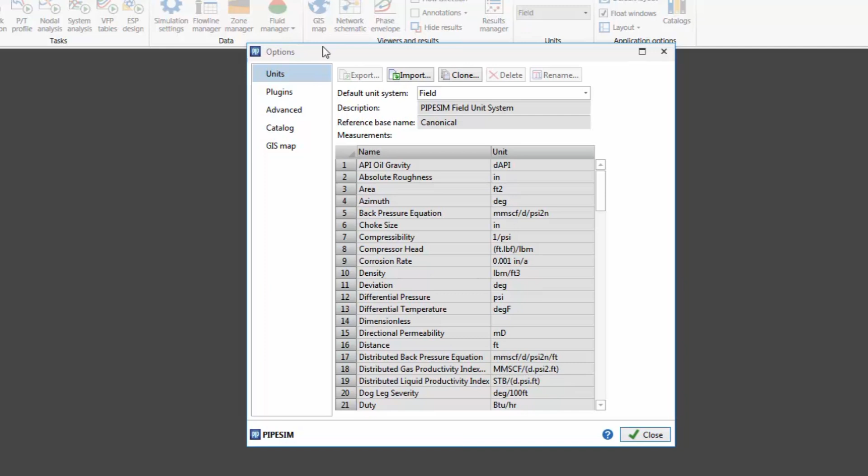Next, we have an Options tab, which allows us to configure the default unit system as well as customize unit systems. There is a Plugin tab to register plugins for user-defined flow correlations or user equipment.

There's an Advanced Application Options tab, a Catalog tab that allows us to upgrade catalogs from previous versions that may contain user-defined pump or compressor curves, and finally, various options for the GIS map.

Returning to the New Model tab, I'm now going to open an existing network. Here I'm going to select from the Case Studies directory, Case Study 301 Small Network. I'll double-click to open that, and here you can see the network appear.

Now, this particular network has one source, one well, a separator that sends the gas to a compressor and then through a pipeline to the sales point, and another line that carries the liquid to a pump and a pipeline to the oil facility.

PipeSim has a ribbon-style interface. The primary ribbon tab that you'll be using is the Home tab. Here there are various simulation tasks that you can run, depending on which objects are selected.

If no objects are selected, you can run a network simulation. However, in order to run other single-branch simulations, you need to select an object that contains a fluid source in order to activate these options.

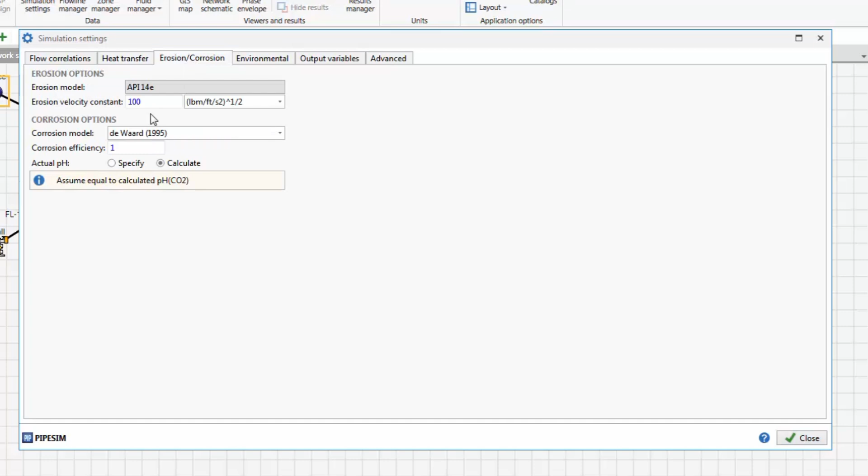The Environmental Data tab allows us to set global values for various environmental properties, such as the air temperature, wind speed, and the type of soil. And if it's an offshore system, we can select MetOcean data, which will provide the temperature and current as a function of depth.

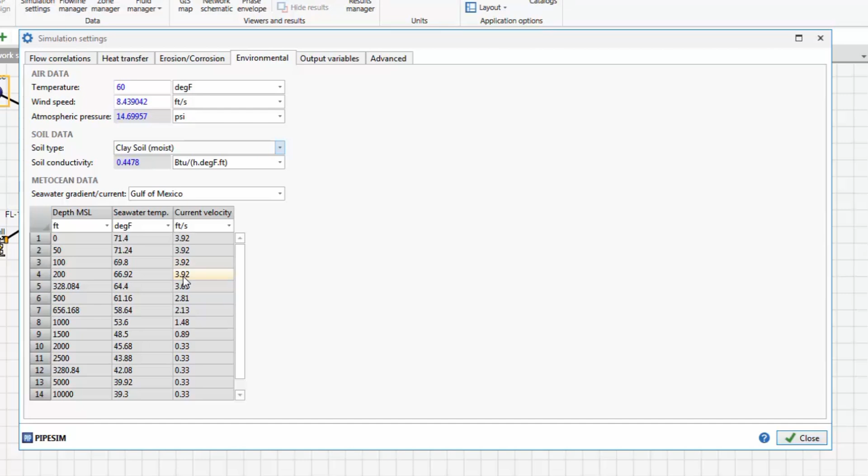Next is the Output Variable tab. Here we can configure the various output variables that we see after we run a simulation for both profile and system variables. There are several templates that ship with PipeSim that you may select. And finally, there's the Advanced tab, which is used for more advanced settings for your simulation model.

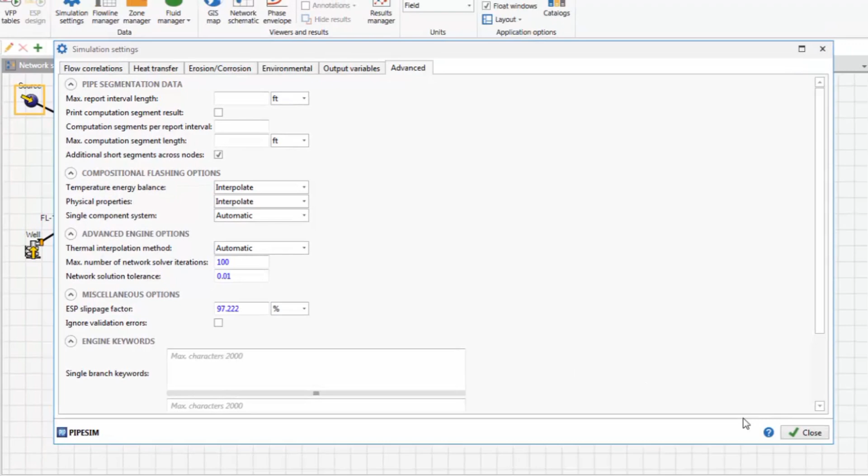Now, after closing this, we can look at the Flowline Manager. The Flowline Manager is a list of all flow lines in the model. You can easily change some of the values shown here in this table, or you could double-click on a row to open the specific flowline editor, so you can make changes here.

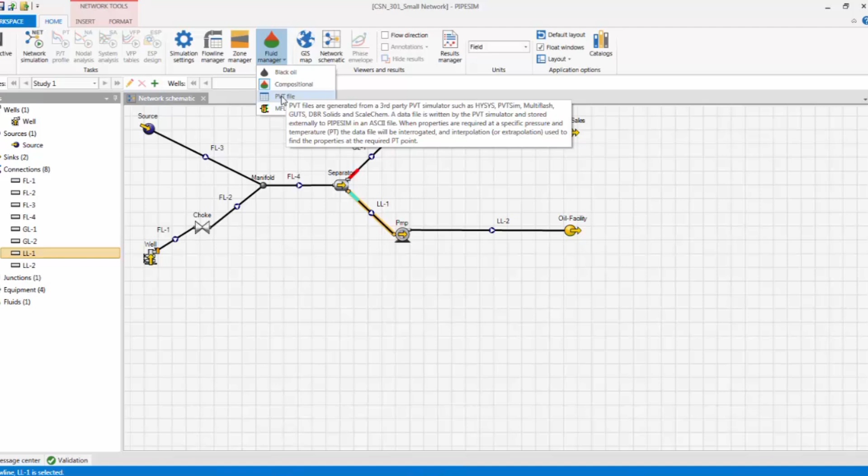Next, I'll talk about the Fluid Manager. There are 4 different types of fluid models in PipeSim: black oil, compositional, PVT files or lookup tables, and multi-flash files. In this case, we're going to run with a compositional fluid model.

Here, we can set the flash package and also select various other options, including the components in our system. From the Fluids tab, we can define multiple fluids and edit these individual fluids.

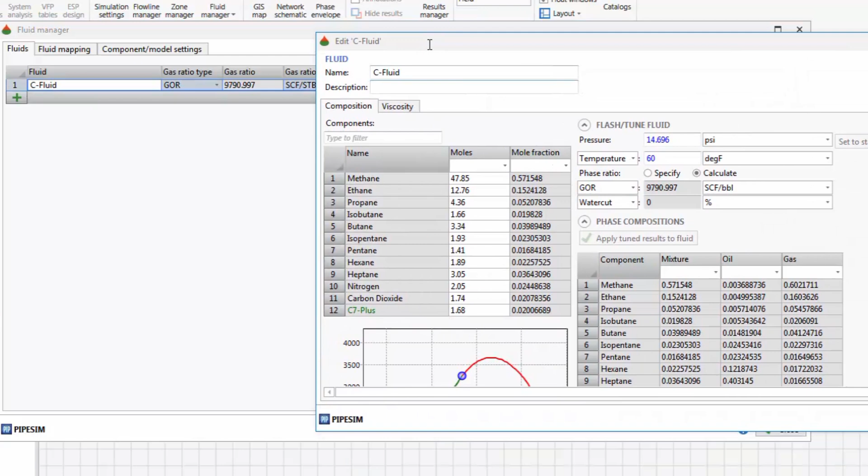And with the Fluid Mapping tab, we can associate the fluids that we've defined with the sources that introduce the fluids into our model.

Next, in this group, we see our viewers. Here we can select to work within the network schematic or logical diagram, or choose to work within the GIS map. Also, we have a phase envelope viewer, which allows us to see, for compositional models, the phase envelope with the production path superimposed on it for branches that contain fluid sources.

Finally, after we've run our simulation and we wish to view results, there are various options for looking at the flow direction, as well as other annotations that we can display. And also there is a results manager that will show us a list of the various simulation runs that we've made and allow us to view and analyze the results.

This group here is the unit selection group. This allows me to quickly change any of the unit systems that are predefined in PipeSim or that are customized from the Workspace Options menu.

This group here is the application options, where I can view and edit catalogs of equipment and change the layout for PipeSim. There are various layout options that position the inputs and task panes in various locations as defined based on your preference.

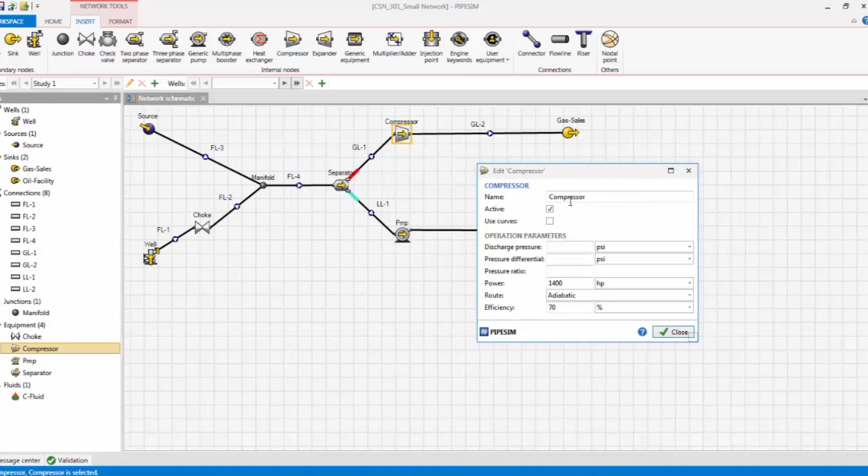Once we've inserted all the objects comprising our model, we can edit these objects simply by double-clicking on them. Here we can modify the properties of these individual objects. And to select another object, you don't need to close this editor. You could simply select other objects from either the network diagram itself or from the inputs tree.

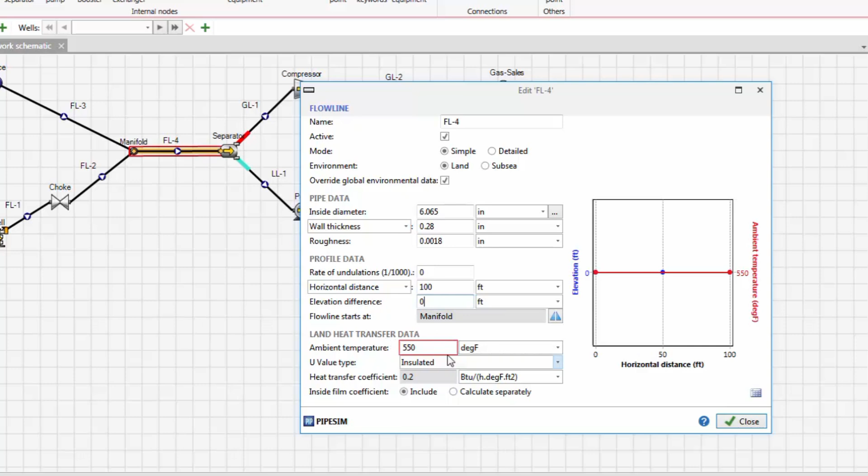So another thing to mention is if I select an object and I enter data that is invalid, you'll see a red box surrounding that field. If you mouse over the field, you'll see what the expected range for that particular value should be.

Additionally, you'll see that there's a red sign on the validation pane, which shows which object has an invalid value. You can open the object by clicking on this link and make the correction.

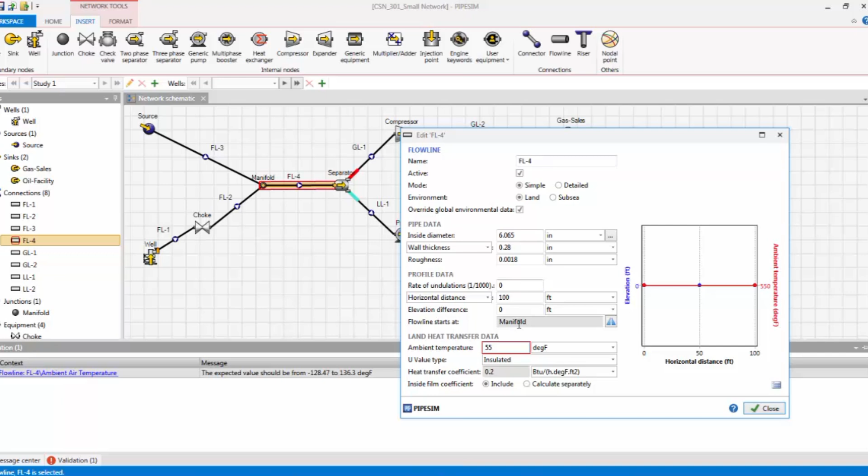Next, we'll go back to the Home tab and select the Network Simulation task. Here, we configure the Network Simulation task with known boundary conditions, and when our number of supplied PQ specifications equals the number required, we can run the model.

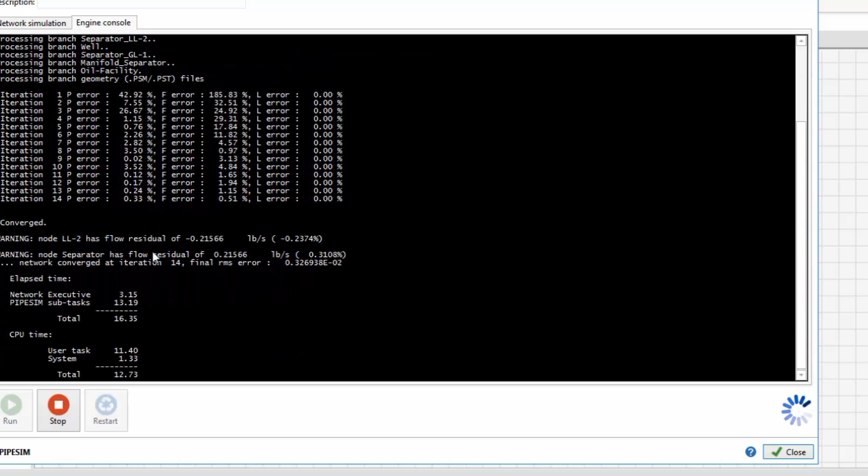Once the model solves, we could then inspect the node and branch results in tabular format, as well as the profile results in either tabular format or graphical format. For more details on running a network simulation, please refer to the demo video on that topic.

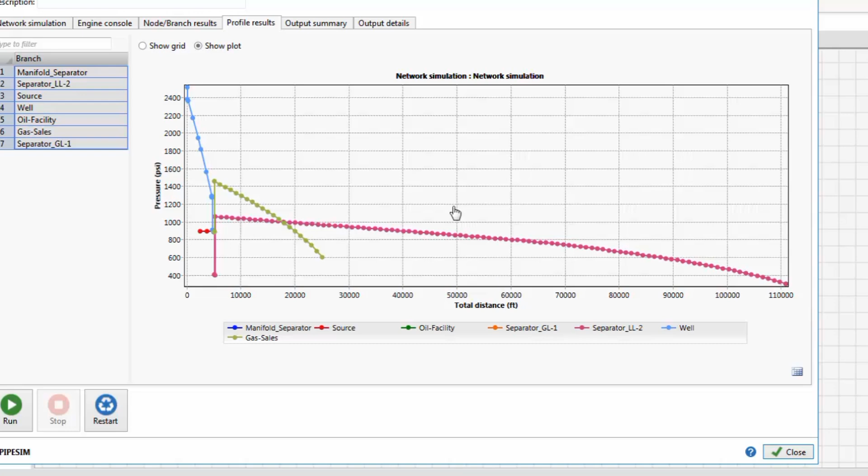We can now save the model. When we save a PipeSim model, regardless of whether it's a well-centric or network-centric workspace, it's all saved with the .pips extension. The actual results are saved in a folder with the same name with a .pipr extension.

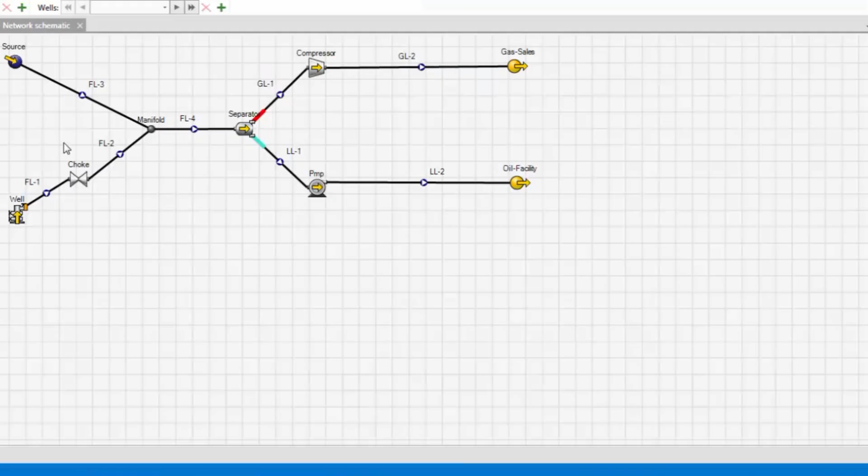Finally, this N shown up here in the upper left-hand corner of the Home tab indicates that we're operating inside a network-centric workspace. This can be changed at any time to a well-centric workspace.

When we enter a well-centric workspace, the options on our Home tab become simplified. The main viewing canvas is the well editor, and the insert toolbars allow us to build specifically the well model.

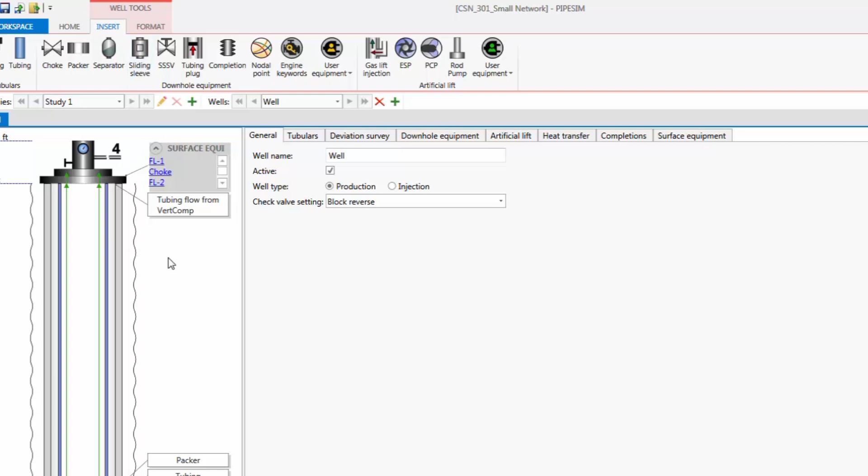If you have multiple wells in your workspace, you could select from amongst these wells with the selector here. And if you have surface equipment, for example, flow lines or chokes associated with a well, they can all be inserted from the Insert tab into this area here and edited in the well editor directly.

This concludes the demonstration video of a tour of the PipeSim user interface.